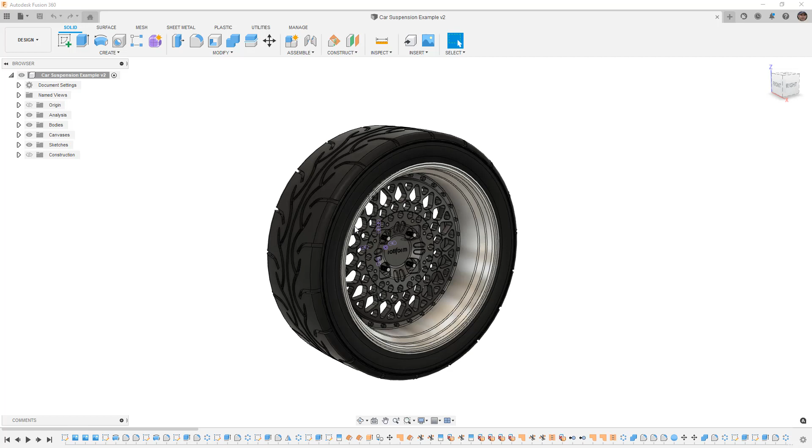So what we're going to take a look at in this example is the Rotiform wheel that we modeled in a previous series that you can check out here. What I want to talk about is ways in which we can shortcut the system in order to get those kinematics.

So in this example, what we have is a couple of bodies. We've got the hardware, the rim, the inside and outside rim, the hub portion, and the tire. These are all portions of the wheel, and they all need to move together as one. And then we have this hub mount.

Now, the hub mount itself theoretically is bolted to the wheel, or the wheel is bolted to it, and it contains a bearing. Depending on the car and the setup, you might just have a spindle on the upright, and there are different scenarios. Honestly, none of that really matters because we're looking at everything as a rigid body.

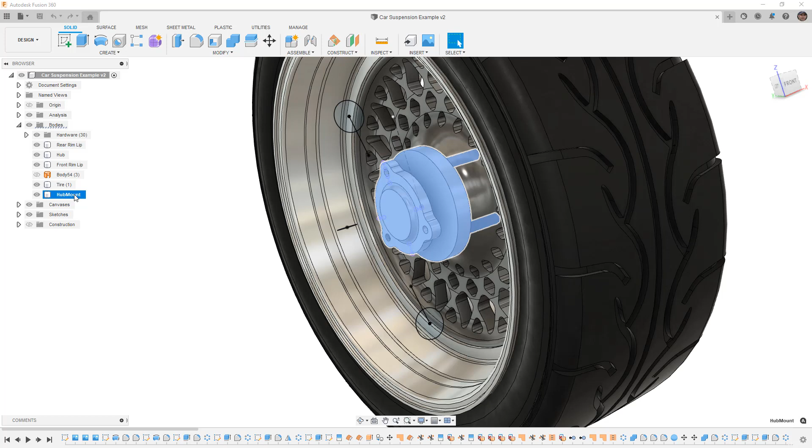We're looking at everything combined as one, and we're not really worried about the rotation of the wheel at this point. So what I want to do is put all of these together in a single component.

Typically, when we start designing and thinking about having a mechanical assembly, we start at the component phase. Now, this design here is just all bodies, and there's a good reason I did it this way, because I want to explain the difference as we go along.

When we're looking at this and we have all bodies, the implication is that all of the sketches and features in the timeline were done initially before a component was created. That means at the exact moment in our timeline where we create a component from this, all of those sketches, the references, all of the things used to create that, no longer matter.

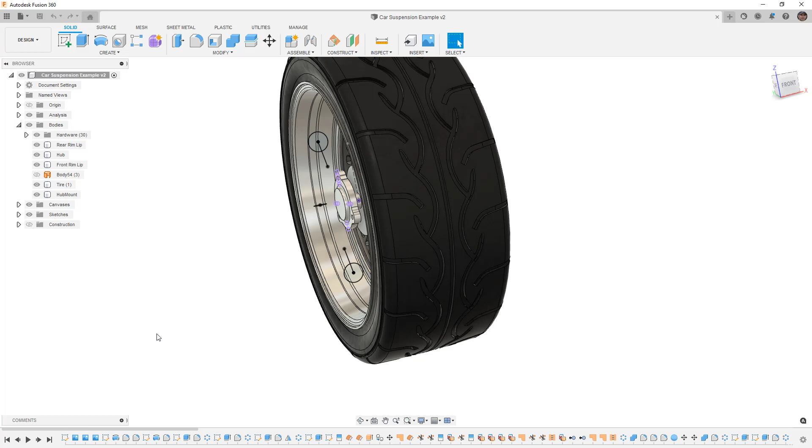Now, in some cases that can be a benefit, in other cases it can be a detriment. The way I did this is I created a sketch or a couple of sketches that have the location for the upper and lower ball joints, as well as the steering position.

We're going to take a look at this as if it's a front, okay? So I did this at the body level, and I'm going to show you how that can be problematic when we convert these to components, and we're going to have to replicate it.

So in order to do this, I want to convert all the bodies to components. Now this gets a little bit tricky because we want them all to be within a rigid group. So I'm going to get started by creating a new component, and I can select the option to create a new component from bodies.

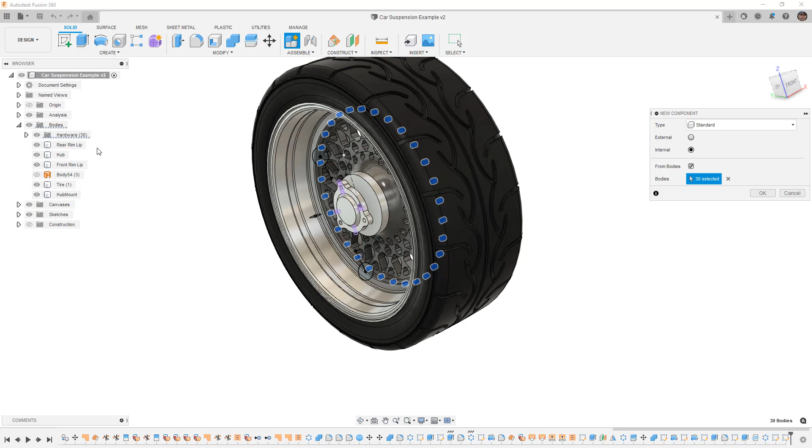When we do from bodies, we have to select the bodies we want. In this case, we have all of this hardware. Now, all the hardware was created as sort of a dummy, so you see we've created 30 different components so far. We're going to select the tire, and I'm even going to select the hub mount, and say OK.

Well, what ends up happening is we've created components for all of those things. And that becomes problematic because now the browser is extremely big, and it's a little bit harder to contain. So we're going to create another component.

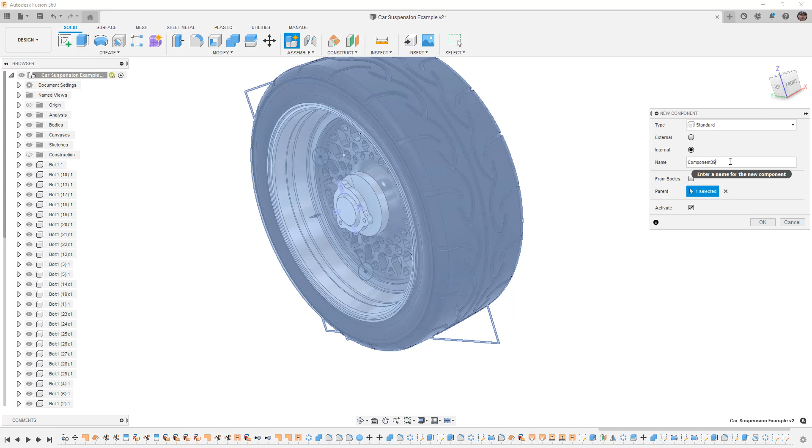This one is going to be called the wheel assembly. I don't really need it to be active, so we can go back up to the top, but the wheel assembly is going to contain everything else. I'm going to just select the hub mount, shift-select the bolt at the top, then drag and drop that into my wheel assembly.

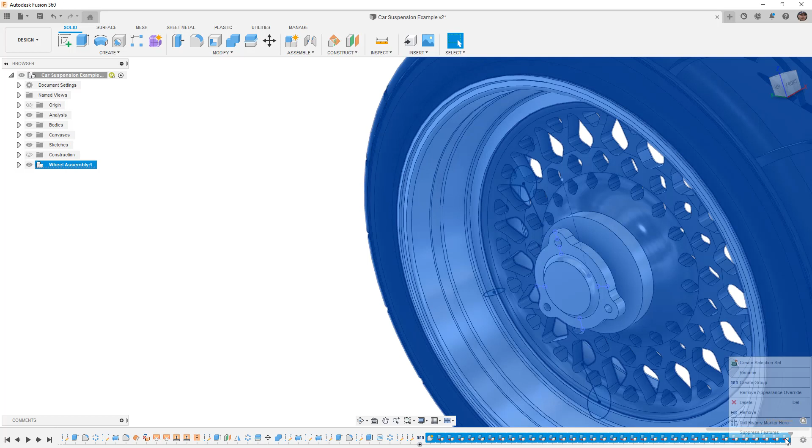Now Fusion's going to do some restructuring, and you can see all of these move components. Essentially what we did was we made this new component, our wheel assembly, and put everything inside of it. So I'm going to shift select all these, right click, and create a group. This simplifies the timeline, and you can see that we're able to expand and collapse. The same thing happens automatically when we turned all those bodies into components.

One thing you'll note is that the sketch associated with this has stayed in this position, which means the sketch itself was not referencing, or was not created at a point where this specific body had its own coordinate system. That's where it becomes problematic, and you need to be really careful about when you do this in your own designs. It's better to have components early on in the design, ideally before you create your first sketch—create a component and then begin working in it. If that's not the case, and you're starting with bodies, make sure that when you create these reference sketches, you do them at the proper time.

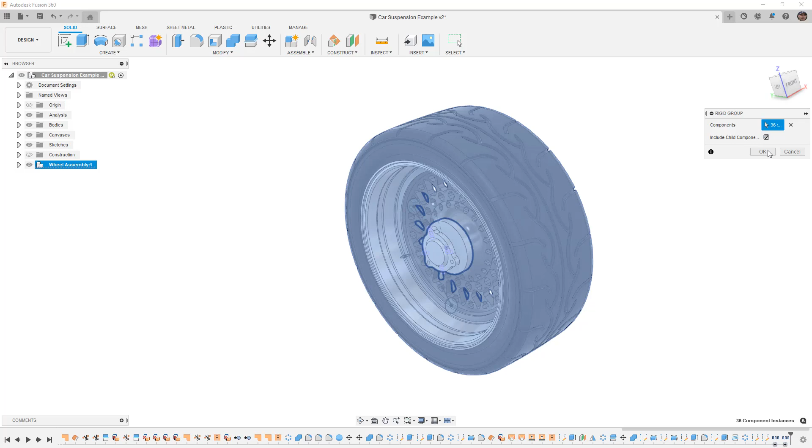Before I create any reference sketches, I'm going to select the wheel assembly, go to Assemble, and create a rigid group. A rigid group, including all child components, will include all of those 30 different bolts, and now you can see that this moves around as one.

Now the next thing I want to do is recreate this reference sketch, and I want it to be in that component. There's a little trick to this—we could determine the point at which we created those components and put those sketches directly in that component before it was converted. But that's not usually the case. Sometimes it breaks, especially when we convert 30 plus components or bodies to components at once, which makes it a little tricky. So we're just going to pretend like we never created these, and recreate them.

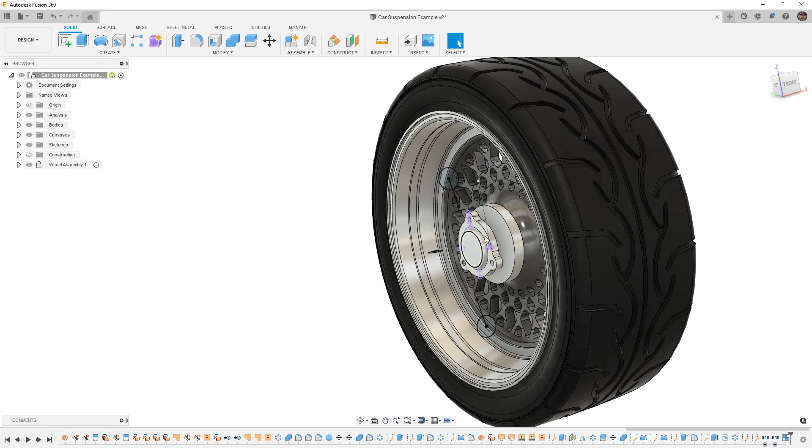The important bit is we need to be mindful of the fact that this component—if we find it in the browser, let's select it, right click and select Find in Browser—it's going to expand it for us, find that component and find the body. We need to make sure we're creating that new sketch reference inside one of the bodies or components associated with our wheel assembly, ideally the hub mount or spindle, or wherever you want to place it.

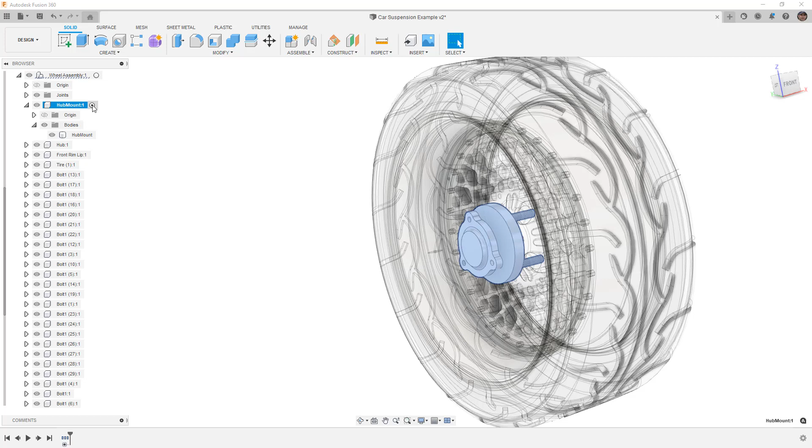So let's go ahead and activate the hub mount. If we want, we can right click and isolate it as well, which gets rid of everything else, making it a little easier to see. Even though we've isolated it, we can always go back and show sketches that we want to use as reference—for example, this ball joint location. I need to be extremely careful that I don't make any relationships, so I don't want to click on these and project them, but it's going to help me plan out where they were.

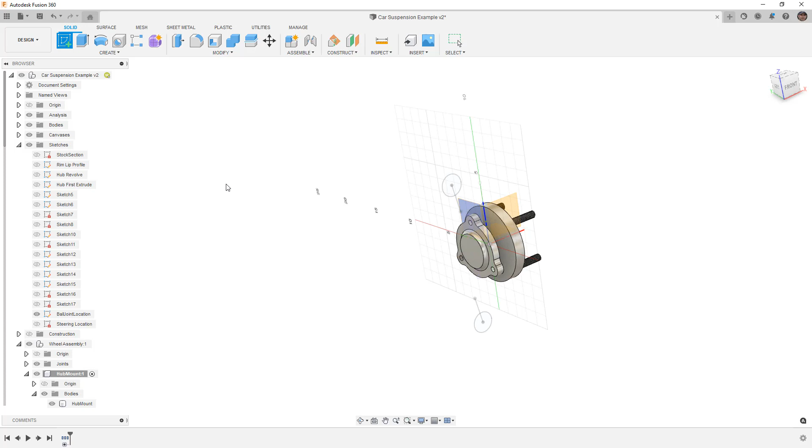We're going to start a new sketch, using the coordinate system associated with this component. I'm going to go to Create, Project Include, and create an intersection that happens on my sketch plane.

Then I want to recreate this. The reason I put a circle and a line there was only to represent the location of the ball, the portion of the ball joint that is actually our pivot, and then the axis in which the ball joint was mounted. Typically, these aren't going to be vertical or in line with each other—it depends slightly upon the setup. Honestly, the direction of this isn't really going to matter for what we're doing, but it's never a bad idea to create these references.

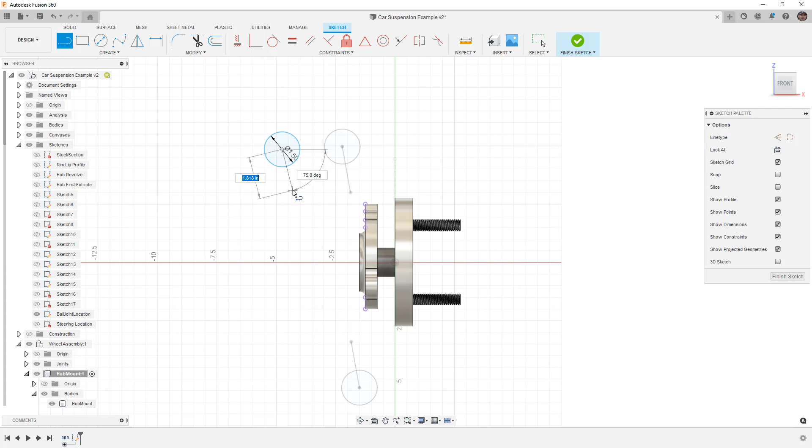So I'm just going to create a 1.5 inch ball, and create a line that comes down, okay. I'm going to repeat this at the bottom and create a line. Then I want to make both of these equal, so they're both 1.5 inches. And then I need to determine the angle and the direction or length of these lines. Again, it's not really that important, but I think it's a good idea for us to understand where these references can have an effect on the design.

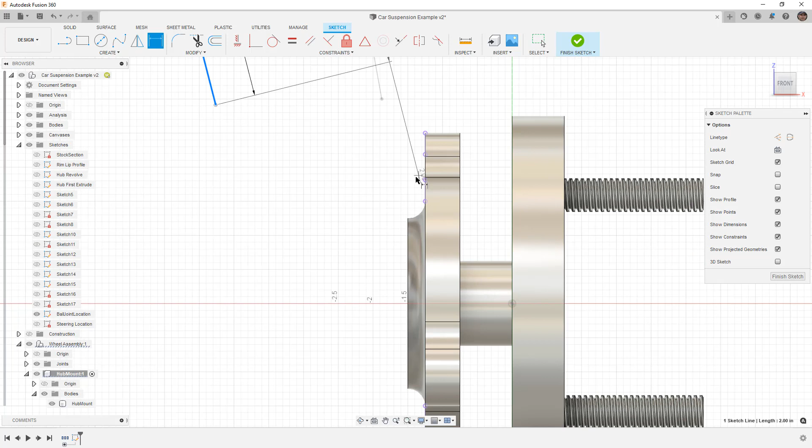So I'm going to create aligned dimensions. I'll make them both 2 inches. Then I'm going to give these an angle between my projected reference. It's a good idea now to hide that original sketch so we don't accidentally select anything. I'm going to make this one 14 degrees, and this lower one 10 degrees, just so they're different. I'll hit escape.

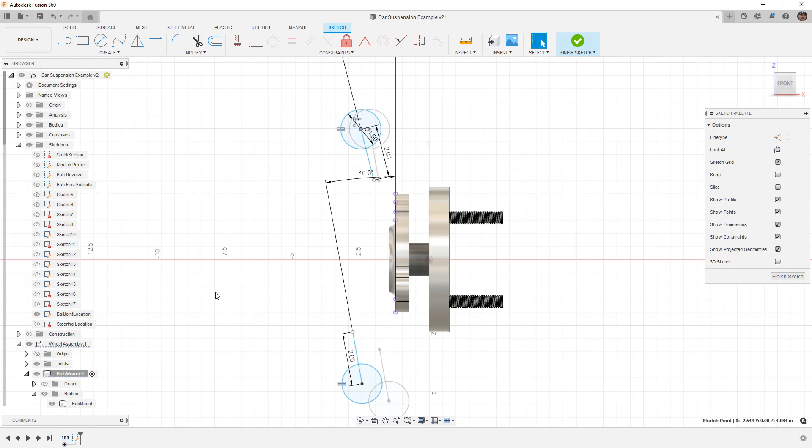Then I want to pull them and put them in roughly the right location. I can take a look at my ball joint locations to see roughly where I put them. I could also bring back the wheel assembly if I wanted to see where the actual wheel is, but this is going to give me what I need. Now I know it's in about the right location, and this one too. I'm going to go ahead and hide that original sketch.

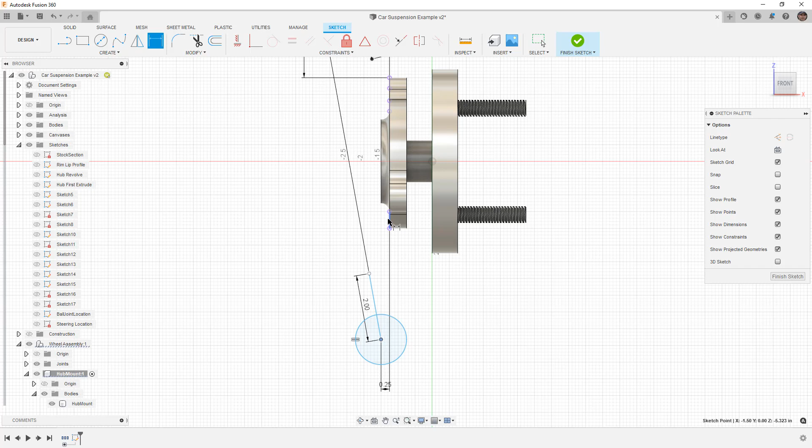Ideally, we know exactly where these are in reference to our assembly, but I'm just sort of picking random positions to put them. 2.5 inches, that's about right. This one is 1/4 inch in front. Let's go ahead and pick a vertical distance, 3.325. And the angles are defined.

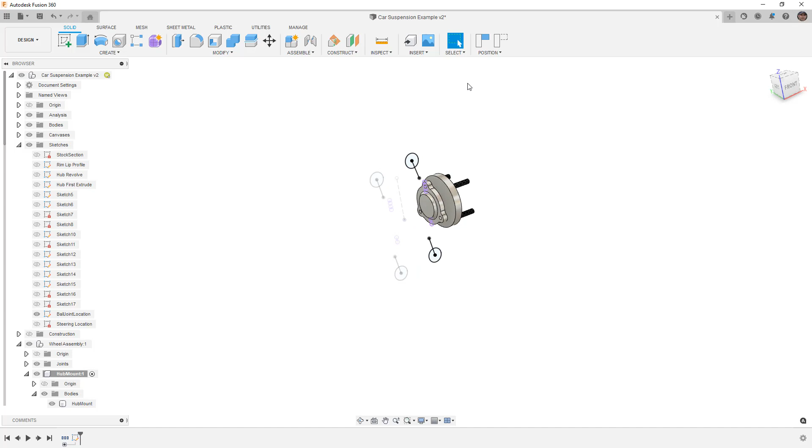So these are my upper and lower ball joint positions. Now, what's important to understand is those are going to move around with my hub. That's why it's important, because if I bring back the original, you can see that stays in position, since it was created at the top level of the design when everything was a body. But we really need those positions to move in unison with our design, so you have to make sure those references are in there.

I also put another position for the steering, if we wanted to account for things like bump steer. So let's go ahead and recreate that as well. In this case, I'm just going to sketch on the top, and again use create, project, include, and intersect. I want to figure out where I'm intersecting this flange. If we select this face, we can sort of pick the center.

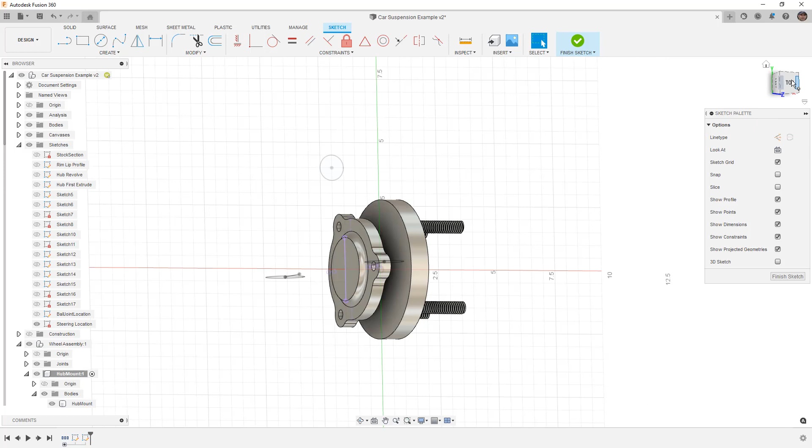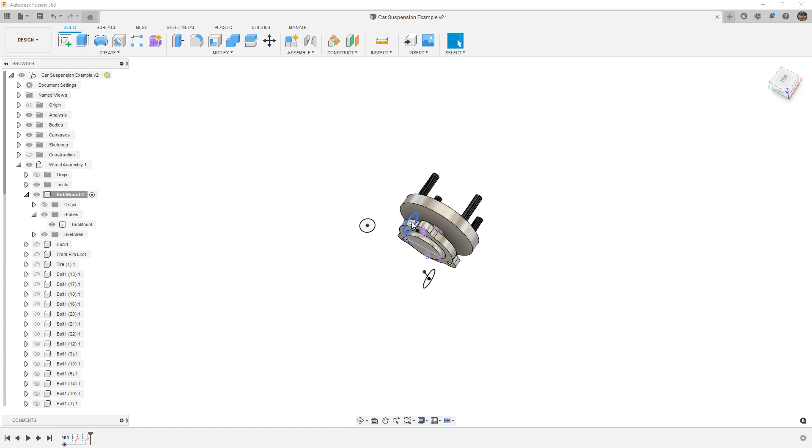Then I'm just going to create a circle. This one is going to be 1 inch, and then I need to pick its position. So dimension off of this face, I'll say it's 1/2 inch, and dimension from the center, let's say we're 4 inches out. Now I have that location, and all of these are going to move with my hub and the rest of the wheel.

So now let's right click and unisolate to bring everything else back, and let's go back up to the top level.

Another important consideration when talking about mechanical motion in Fusion 360 is that we need to have components, because components have their own coordinate system and are free to move about inside the environment. So every design has a component that you build in, whether you know it or not, and that component has its own origin. What Fusion 360 does is track the location of the origin of every other component.

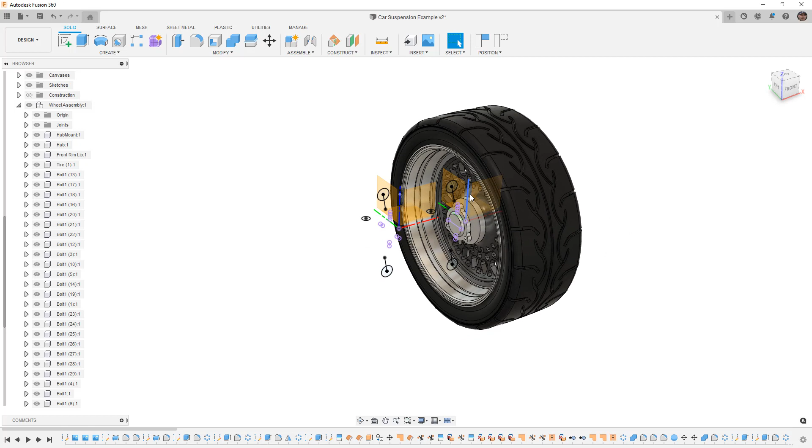For example, our wheel assembly has its own origin. If we move the wheel, it knows exactly where it is in relation to the original origin—that's rotation and position. Understanding the difference between all of those is how Fusion 360 makes these assembly rotations work. So what we want to do is make sure that at the very top level of our design, we understand the nuance between having things at that top level in reference to its own coordinate system, versus having things at the component level and allowing it to move around.

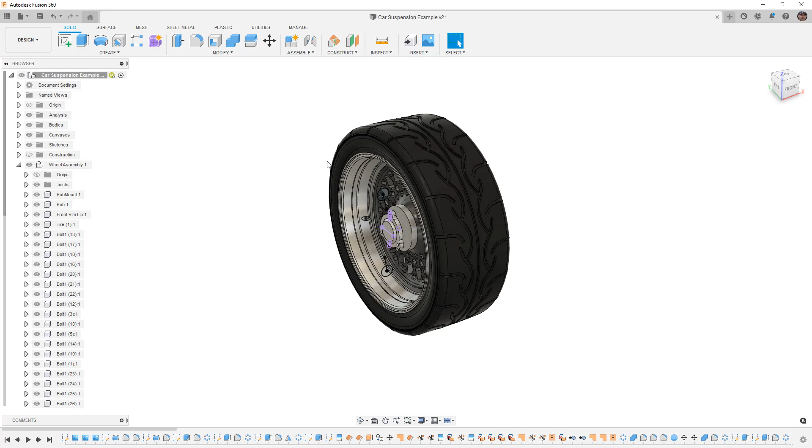Now that we have a little basis for that understanding, let's figure out where we want the suspension positions to be. I did mention that we need a component for assembly motion to take place. The catch is we can actually have a single body, simply because at the very top level that's going to be fixed in relation to its own coordinate system. So we can have bodies and sketches for those references, but it's really best practice to make a new component for this.

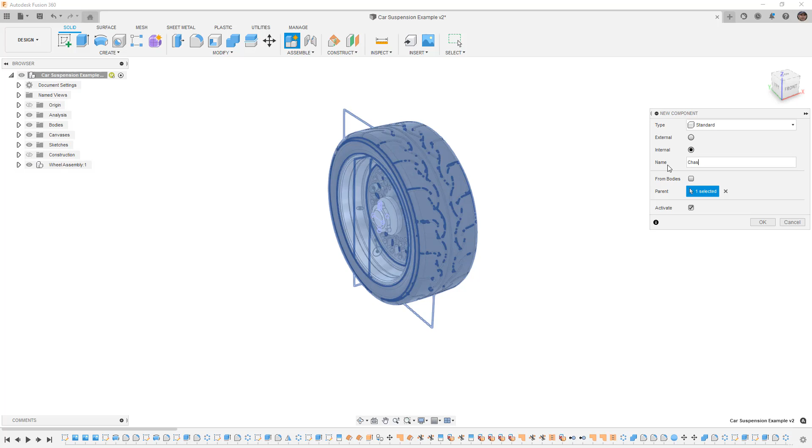So I'm going to go ahead and make a new component. I'm going to call this chassis. And the catch here is to make sure that the parent is the very top level.

Now, if something is active, so we're currently active at the very top level of our design, that's automatically going to be the parent. And then we have this activate option, which means we're automatically in edit mode inside of there. I'm going to go to a front view.

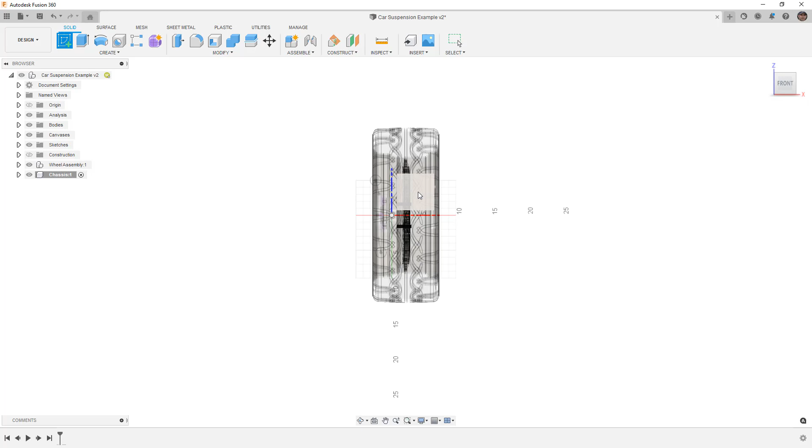I'm going to start a new sketch, making sure that I'm selecting the plane that's displayed. That plane is going to be inside of my component. And now I need to pick the location for my suspension. Ideally, what we would do is base it off the origin. If that's exactly what you want to do, the trick is using move before you start sketching.

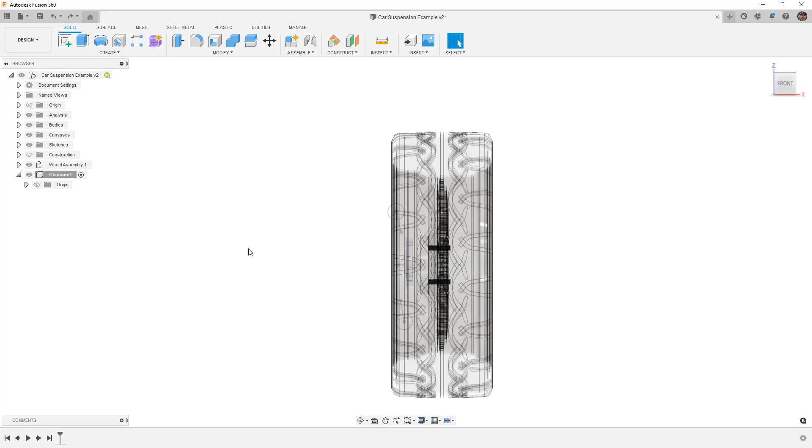So if we do Control Z to undo, I'm in a front view. I'm going to show the origin of this chassis component, and I'm going to use move copy. Make sure that we use move components, and make sure that the component we're moving is the chassis. And then we can simply pull this over a distance inside. In this case, let's go to 20 inches, that's from the center of the wheel. And we're going to capture its position and say OK.

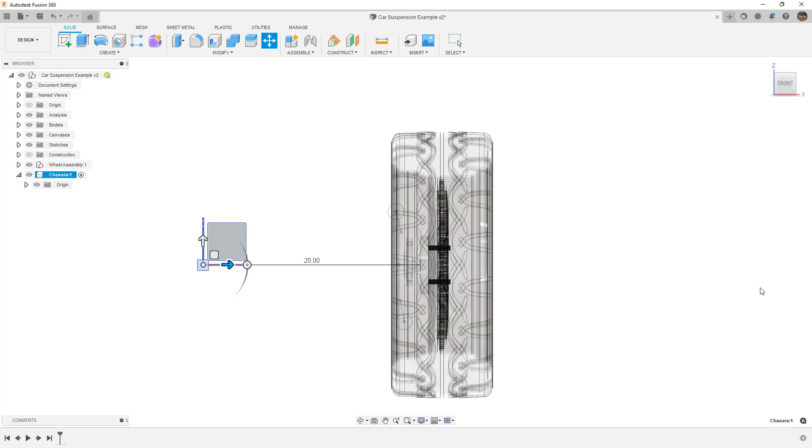Now, if we start to sketch inside of this chassis component, my origin's now over here, so now I can use this as the basis for my design. For this example, I'm not going to go really deep into all the nuances of the suspension geometry. In the last video, we talked a little bit about instantaneous center and roll center and the projection of those lines. I really just want to get to a position where we can make some assembly motion happen without wasting a bunch of time modeling components.

So I'm going to create my upper suspension position. I'm going to make sure that it's slightly lower than this. You can see that it's on this horizontal line, which is at about 5, so I'm going to just put it slightly below that for that point. And this one, I'm going to make roughly horizontal. I'm going to hit escape.

I want to make sure that all 3 of these points are vertical. Now, I know that that's not typically the case. Most of the time, this point is going to be inside a little bit, and it's going to affect the suspension geometry. Again, I don't really care at this point, I just want to make sure that we can understand the example.

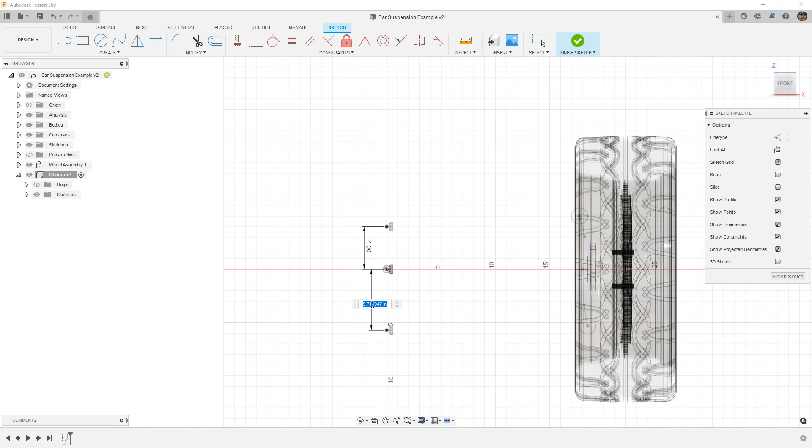So from the origin, I'm going to add a dimension. I'm going to give 4 inches for this one. And then we want to make sure that we have this fully dimensioned as well. Again, this is another important part of the process, is to make sure that our references are fully dimensioned. Let's finish the sketch. And next, I want to create a reference location for my steering axis.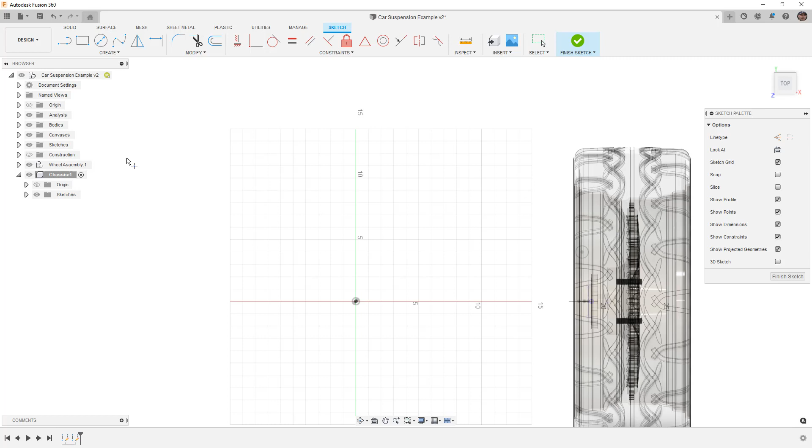Now, while this isn't strictly required, we could lock this axis of rotation. What I do want to make sure we understand is that bump steer is going to be a thing. So we're going to just create a suspension point for the rack and pinion. So note we've got the steering point that we created. I'm going to make this one inward just a little bit. And then instead of dimensioning it, I'm just going to go ahead and use the fix unfix, and I'm going to finish the sketch.

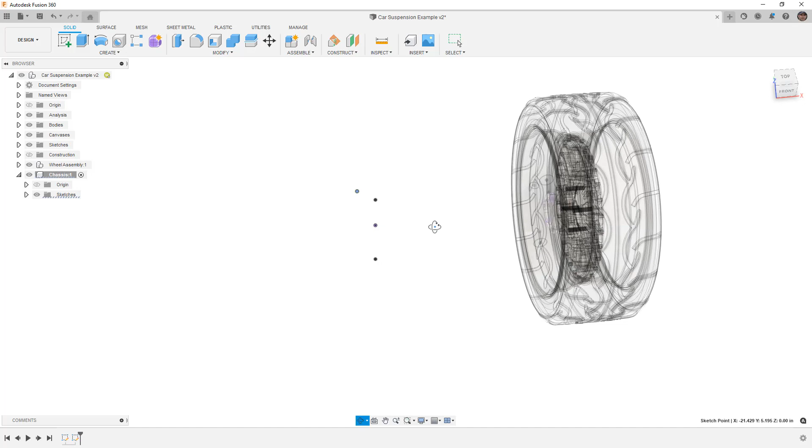So now we've got points for our upper and lower suspension, and we've got a point for our steering axis. If we go back to the top level of our design, since this is a component, this component is free to move about inside of this coordinate system. So we're going to right click and we're going to ground it. Now what we have is the wheel assembly that can move, and we've got this component here which is grounded in our assembly.

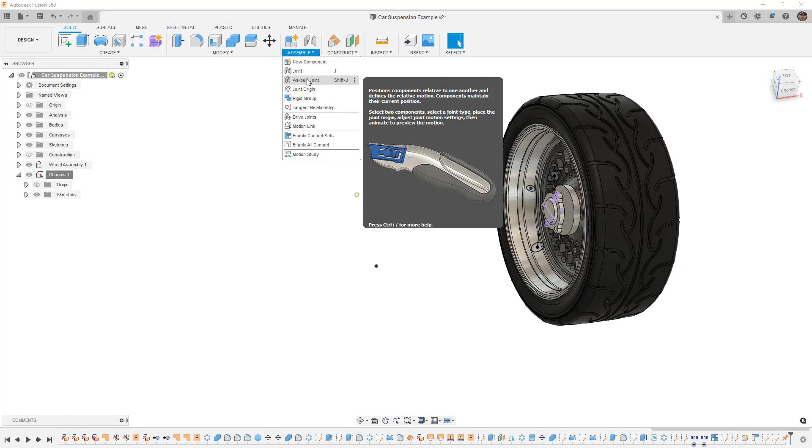The trick to make this work is to understand that as-built joints, which make use of the current location of components, actually don't really care if there's any solid geometry at all. All they really are tracking is the coordinate system itself. So as long as we understand the relationships between all of the various points, then we can actually define the kinematics in 3D without ever having to worry about modeling anything, at least at this concept phase.

So what we want to do first is we're going to create an as-built joint. We need to pick the joint type. Now in this case, what I want to do is I want to pick a ball joint type. But there's one step of this process that we forgot. The thing that we're missing at this point in the game is a component that is representative of the A-arms themselves. So if we make a relationship between this point and this point here, let's just do it for example's sake.

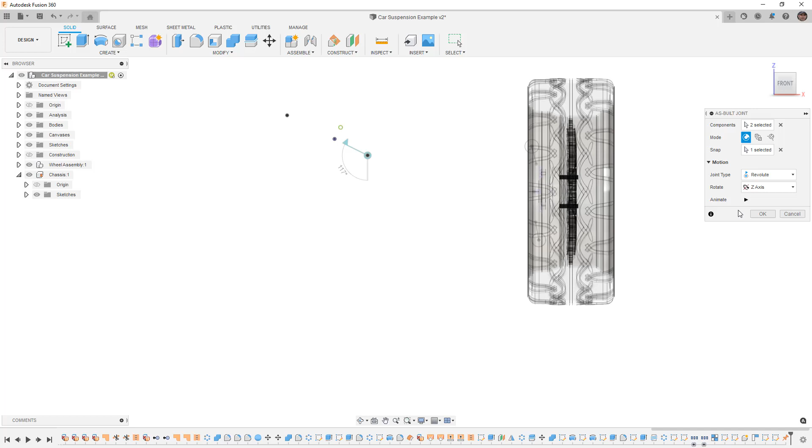If we make an as-joint or as-built relationship, let's say revolute, between our chassis and our wheel assembly, and we pick the point of rotation, what this means is that this component is just going to simply rotate about that point. And that's not really ideal for what we're doing. So we're going to Control Z to undo.

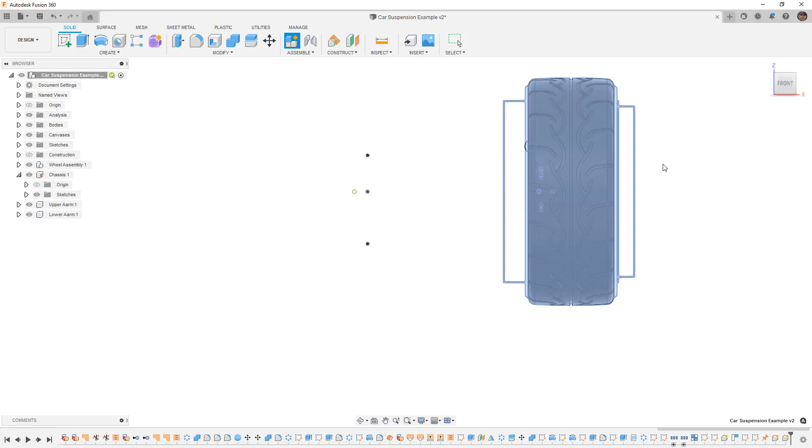Then we're going to create some new empty components. I'm going to call this one upper A-arm. I'm going to create another one again at the top level, turn off the activate option, and call this one lower A-arm. I want to create one more for my steering link, and I'll just call it steering. So now we have 3 components, each with their own coordinate system, even though there's absolutely no geometry—there's not even a sketch in there.

So what we want to do at this point is start to create the relationships between these. When we're talking about the way in which an upper or lower A-arm interacts with the mounting points at the suspension, depending on how you designed it, you might have some rotation or some flex. In our example, we're going to assume that we have a revolute position, so we have 2 mounting points with bolts going through, their axes are in line with each other, and that's how we're going to handle it.

So let's go to as-built joint. We're going to do revolute between the upper A-arm and the chassis, and then the snap point is going to be that rotation point we created. Let's go ahead and repeat that process—this time using the lower A-arm and the chassis, with our snap point being that lower position. Now we're going to repeat the process with as-built joint, but this time we're going to use the ball joint option.

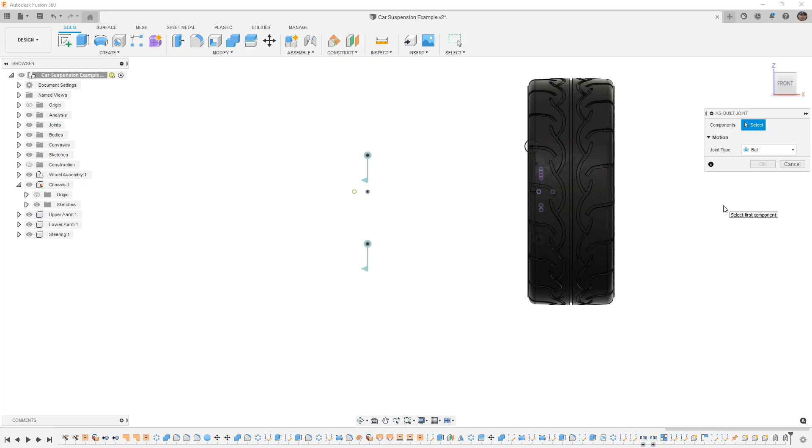Now, revolute allows for 1 degree of rotational movement. When we have a ball joint, we're allowing for 3 individual rotations about individual axes—X, Y, and Z. We can lock these down and restrict their movement, but at this point we want to make sure that the wheel can not only pivot but actually rotate and account for steering. If you don't want to account for bump steer, then we can simply just do rotation.

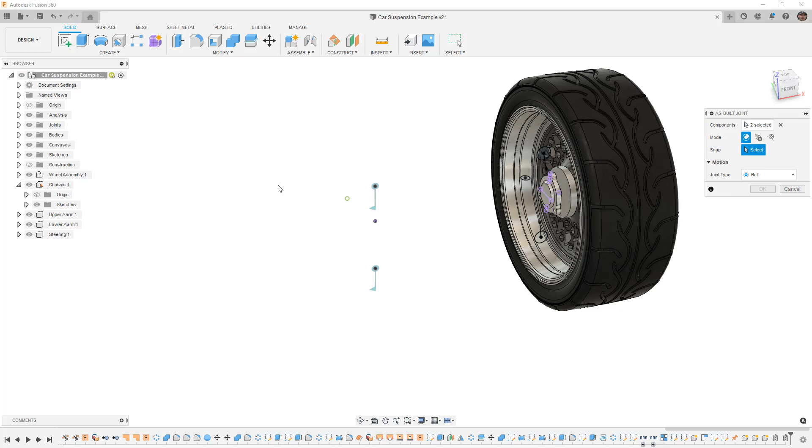Another thing to note: because our components are all rigid, it's not actually going to matter which component we select, but just for continuity's sake I am going to select the component in which we drew these sketches—though again it's not really going to matter. This is going to be between the upper A-arm, and the snap position is going to be the center location of that ball joint. You can see that we've got the rotation for the pitch and yaw, and we can change those later if we need to.

We're going to repeat that process, again with the same component, this time with the lower A-arm, and pick our pivot point. The last thing we need to do is take care of our steering. So the steering is going to be an as-built joint between it and the hub, and again we're going to pick that location. So we've got a ball joint set up there.

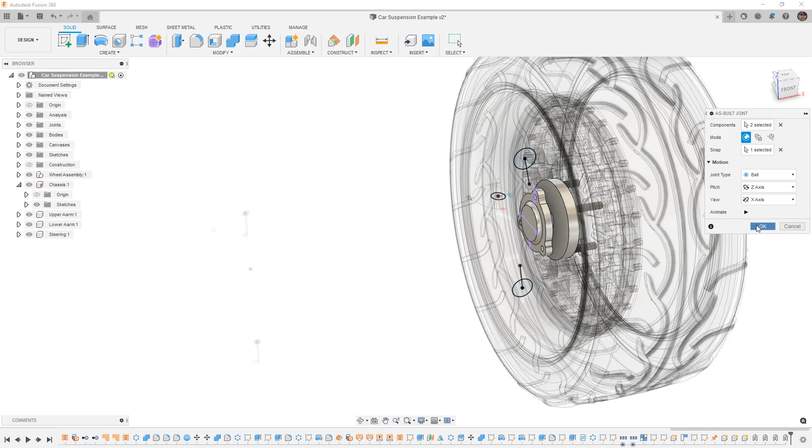Again, what we're going to have to do is really think about the kinematics of our assembly. At the car itself, we're going to have a ball joint because this is not going to just travel up and down. So we're selecting steering and chassis, and picking the location.

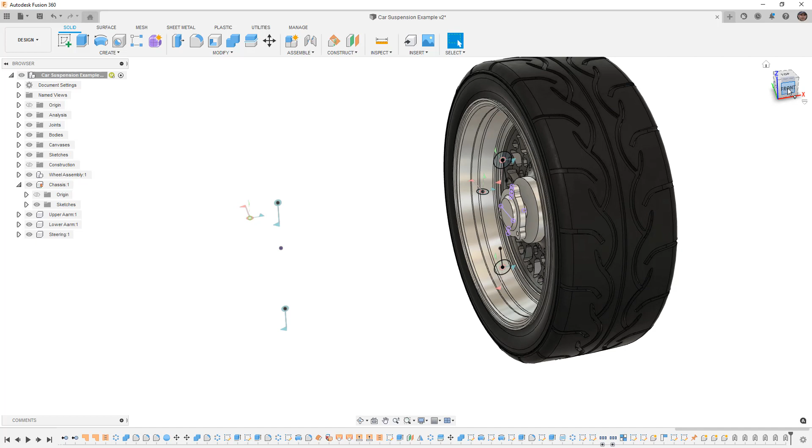Okay, so now if we did everything correctly, we should be able to move the tire up and down through its travel, and we can see what happens with the steering as we move up and down. So we're rotating, and we've got the revolute axis about each one of these upper and lower A-arms. The wheel itself is mounted on ball joints, because what's actually happening here is as we're moving up and down, since the steering location is inside or not in line with anything else—we just sort of picked a random spot—we're getting what's called bump steer.

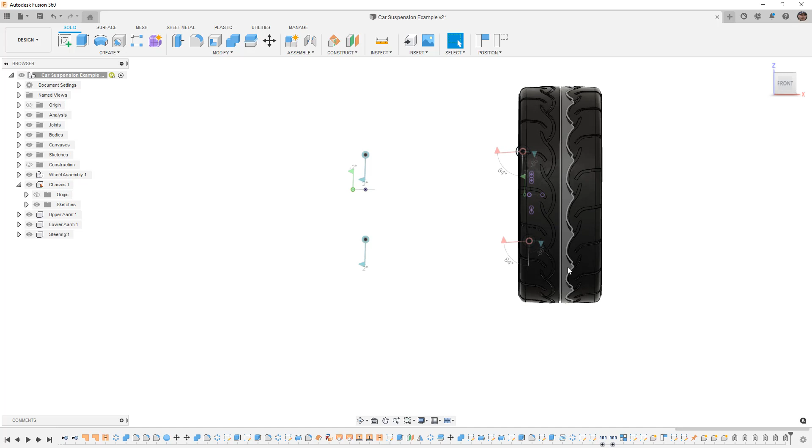So at perfect ride height, sitting level on the ground, not accelerating, not braking, the wheel has no toe in—it's not steering at all. But what happens when we start to compress the suspension, you can see it's starting to go toe in. We can play around with the location of these points, the point on the spindle or the point on the chassis, and figure out where we want to put that.

I just drew it completely on the horizontal plane, but we could also move it up and down vertically. If you want to set something like an offset plane and then adjust where that offset plane is, you can move it up and down and see how it affects bump steer.

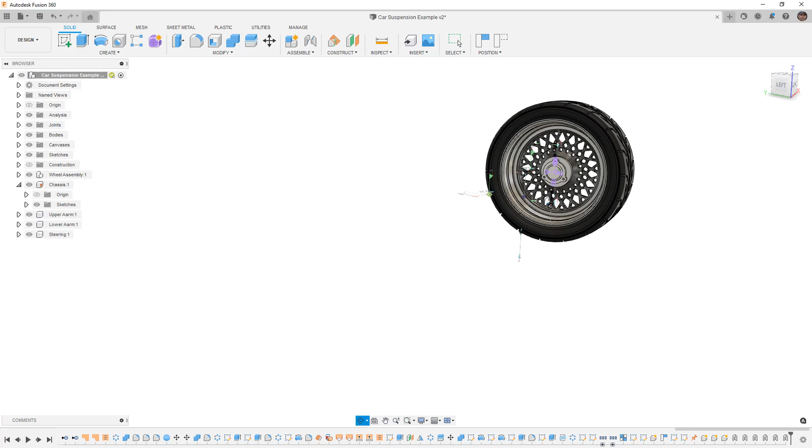But this is a basic example, and obviously I have a lot of geometry because I have an entire wheel and tire, and I drew a sort of a fake hub just to be there. But we don't actually even need that much. We could create a two-dimensional sketch that shows the cross-section of the rim, the tire, the hub, and the mounting positions for the suspension.

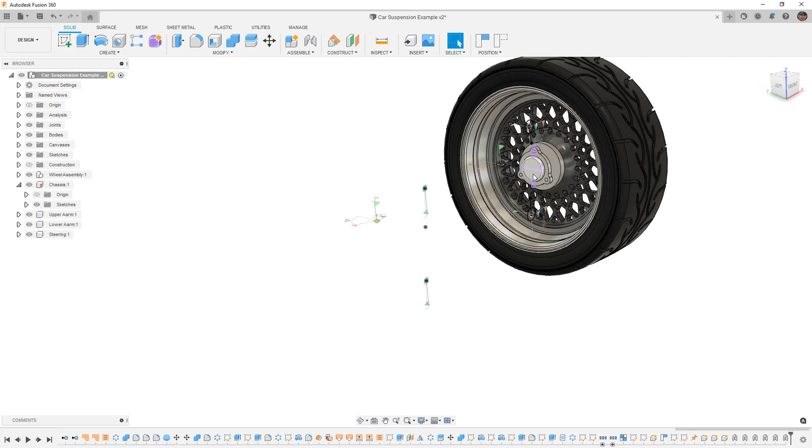Or we could just put the points in space and have a very basic representation as a box. And as long as that is in a component that has its own coordinate system, then as we move up and down, we'll be able to see the travel of the suspension.

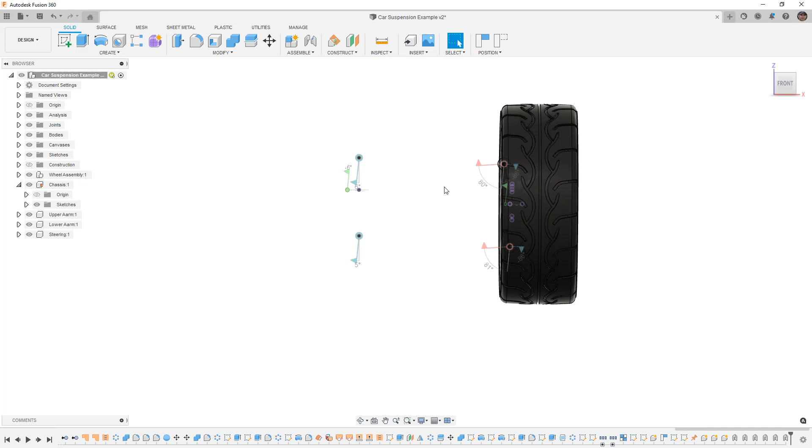So this example, you can take it as far as you want to take it. This was a very introductory basic look. But before we finish this example, the last thing I want to do is show you what a motion study is and how we can use it in this example.

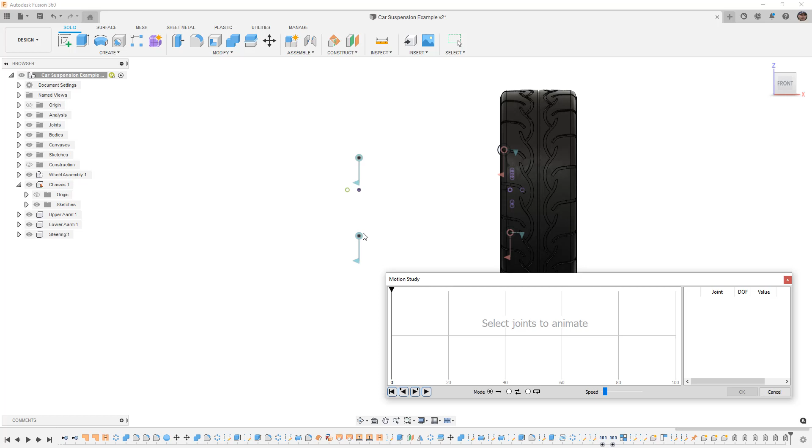Once you have everything set up, we're going to go to Assemble and select Motion Study. Now when Motion Study pops up, what we need to do is select joints that we want to animate. This is something we need to be extremely careful about. In this case, we want to select either the upper or the lower revolute joint. The reason we want to select the revolute joint is because we've only got one degree of rotation.

So we pick this, and all we need to do is tell it the amount of angle that we want it to rotate. From here, what we have is revolute, and it's set at 0 degrees. At 40, I'm going to click on this line, and this line allows me to determine the angle. So let's say I want to see what happens when we go 15 degrees positive.

Now, 15 degrees positive is actually moving the wheel in the opposite direction. So let's say -15, and now it's moving it up. It's probably way past the amount of travel we'd ever expect, considering this is where my lower arm is mounted. So let's say -10.

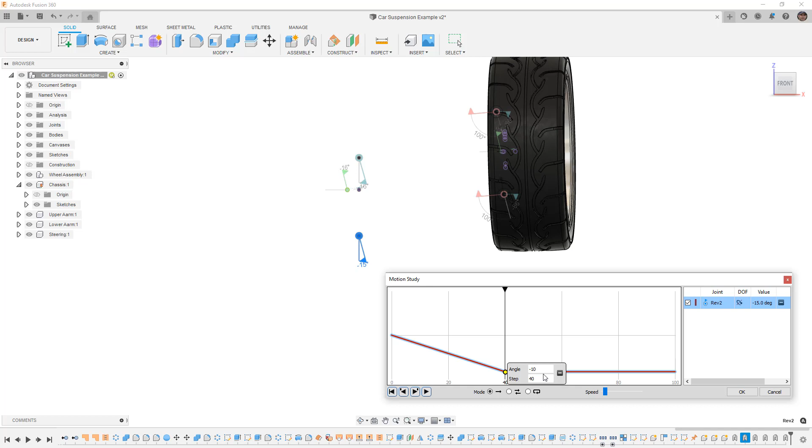Next, I'm going to go up to 80, and set this back at 0. I'm going to set this to loop, and then we're going to play through. So now we can watch the wheel go up and down. We can increase or decrease the speed, and we can take a look at the position in which we are actually moving through.

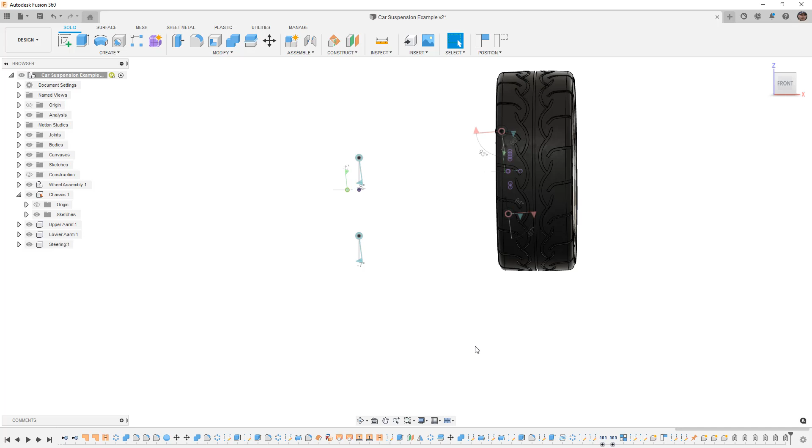If you set this up properly and do a little bit of extra work to set up the steering geometry properly, we could have the steering component comprised of two separate components. That would allow the steering component to actually turn or move and represent things like suspension travel while the wheel is turned. There's really a lot you can do with this, as long as you fundamentally understand that all of these separate elements need to be in their own components purely because they need to have their own coordinate system.

As long as they have their own coordinate system and you model them in the right position, then you can use as-built joints and replicate any complex mechanical motion with just some basic sketch elements. So if you have any questions on this, please let me know.

It's something that is probably a little outside of a normal workflow. Most people are going to go in and start to model things and then put them together and add those joints. But honestly, the power of Fusion 360, using assemblies with components and having their own coordinate systems, actually gives us the ability to sort of skip the 3D modeling design phase and use this sort of functionality of as-built joints to see what things would do.

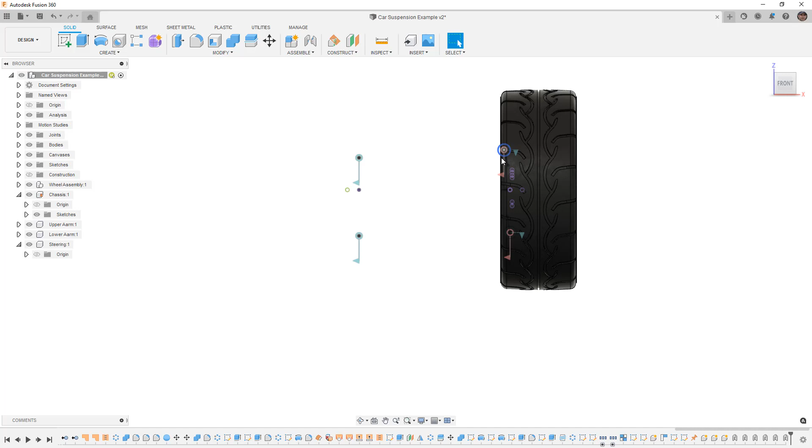Remember, the wheel, the tire, all the solid bodies we have in here aren't even really required. The only thing we need is to have the sketch reference points that we want to use, and we need to have an understanding of the kinematic joint relationships that we want to use in those.